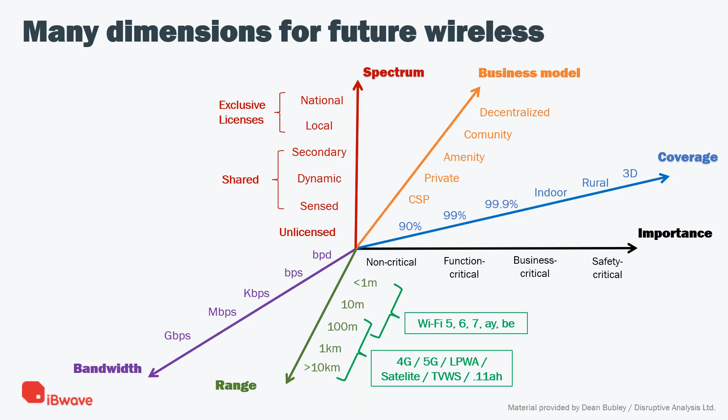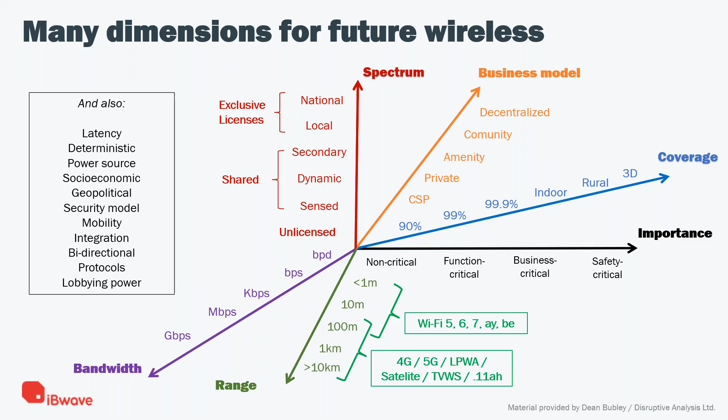And of course we are talking about many more aspects, some technical, some geographical or geopolitical. So we have latency, which is an important thing right now, and mobility. We have a lot more things, and probably in the future we will replace some dimensions, or we will have more dimensions for future wireless systems.

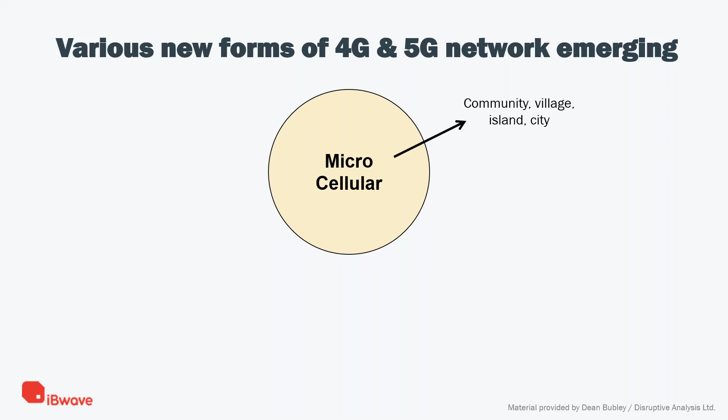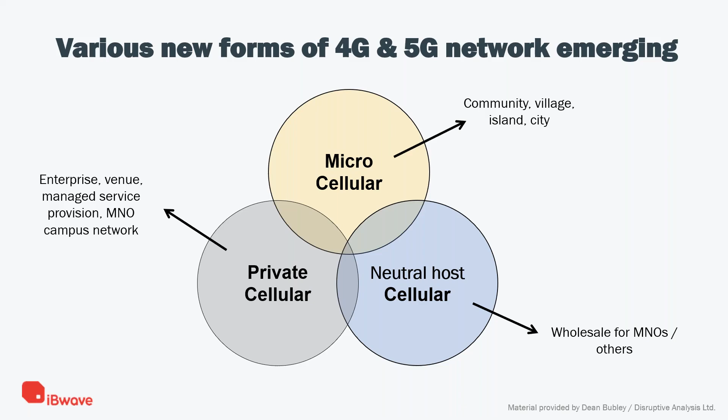But specifically for 4G and 5G networks, we have seen new forms emerging in the market. We started with microcellular systems, then we started to see neutral host cellular systems, and in recent years we started to see private cellular systems specifically. So what were the motivations to start with private cellular systems?

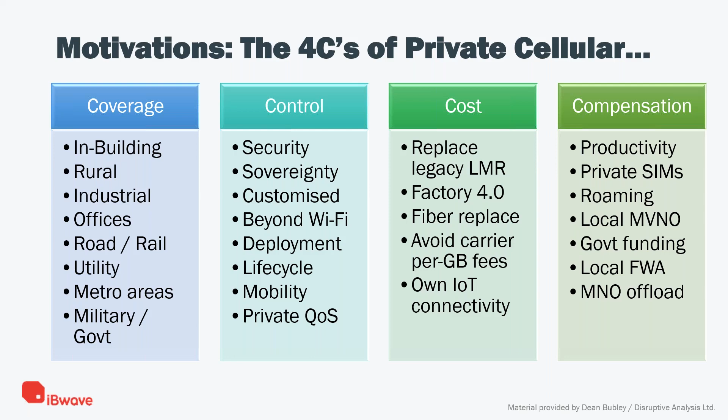And of course, the different companies start to see different necessities to control the system, from security up to customized systems, the deployment, the life cycle of each design. And of course, they are looking for cost, right? So looking for cost, they are looking to replace legacy LMR, fiber replacement, different types and new types of cellular systems. And of course, they are looking for some compensation, right? In productivity or roaming or different types of compensation. But basically with these 4 motivations, we start to see the beginning of the private networks.

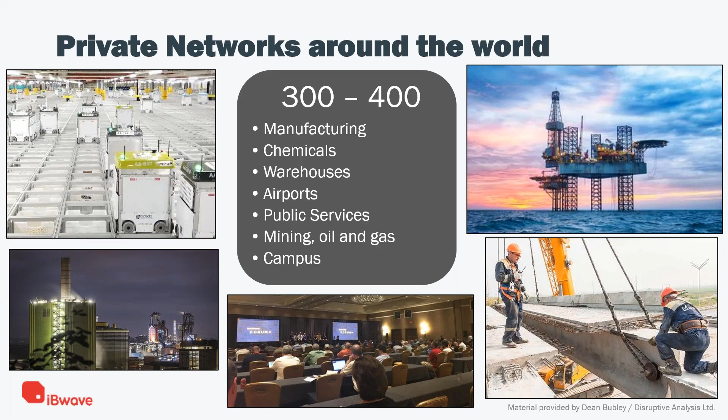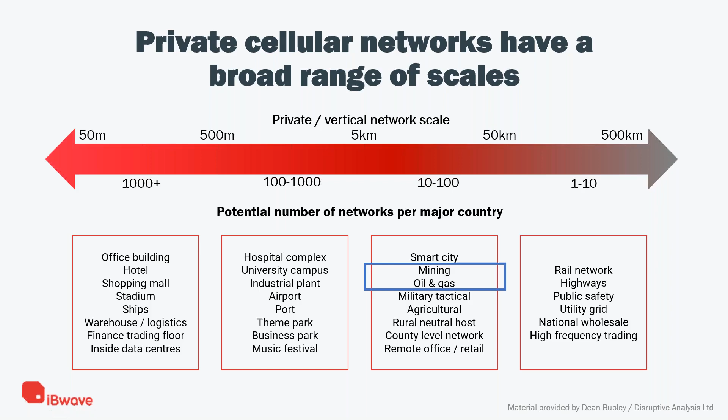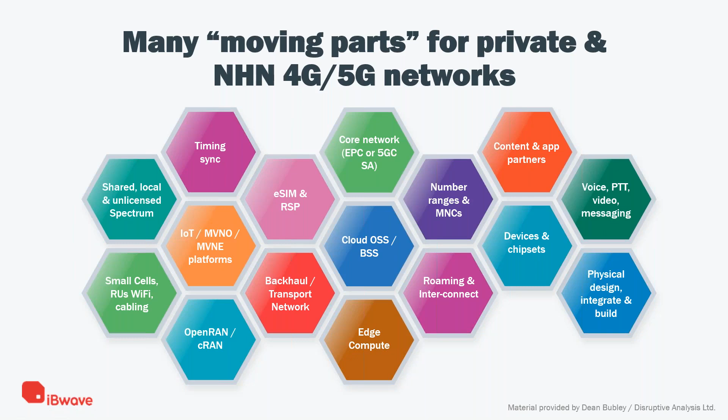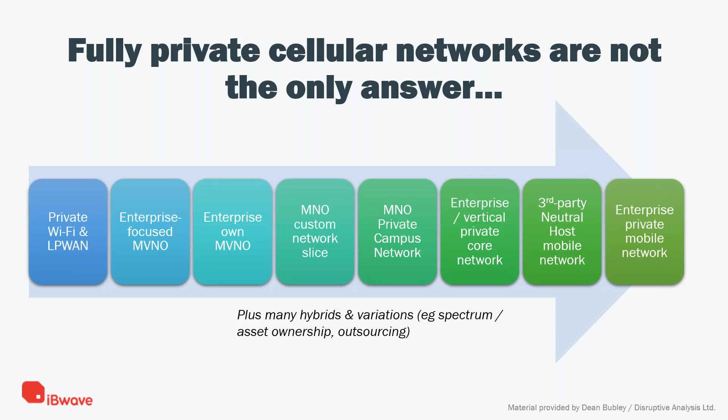So for each one, we will have different types of applications. And for this reason, since we have a lot of moving parts, a fully private cellular network is not the only answer. We will have a lot of different business models to implement our own private network, from the simpler ones, the private Wi-Fi network and LPWAN network, up to an enterprise private mobile network, for example. And we have many more hybrids and variations that we can implement. So the message is: not so easy, but we have a lot of options to implement a new private network.

And every time that we talk about private networks, we have a typical question, right? Will the alternative networks replace Wi-Fi, or how is the competitiveness scorecard between Wi-Fi and the new alternative private networks? And here the answer is: it depends. Because in different types of environments and markets, we will have some technologies that are optimal for one or problematic for others. So if we look at Wi-Fi, we have Wi-Fi as an optimal solution for some of these applications or environments, but a problematic solution for others.

And even Wi-Fi is changing, right? Right now we have Wi-Fi 6, and Wi-Fi 6 is more optimal for some, and better or worse for others. But when we look at the alternative networks, the same applies. They will be better for some environments, worse for others. So in general, I think that one will not replace another. Everybody will live together, and we will reach different environments with different applications and solutions.

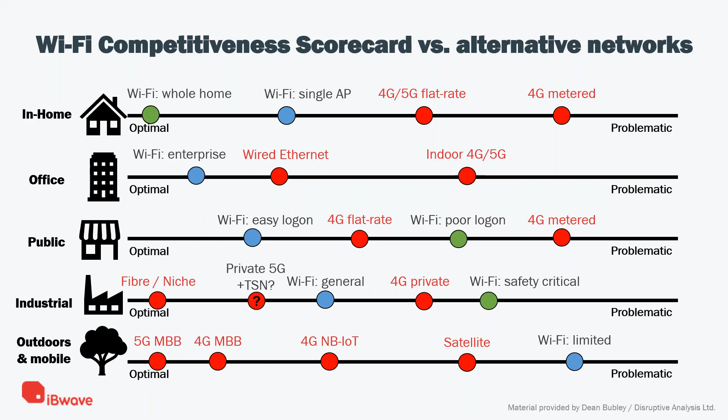And 5G will drive transformation of telecom itself, because if you look at the 4G era of mobile operators, normally we have the traditional operators, national and international operators. Depending on the country, you can have 1 up to 4 or 5 traditional mobile operators. But in recent years, we could see the tower companies, we could see the mobile virtual network operators, right? And with 5G, the expectation is to have consolidated national MNOs.

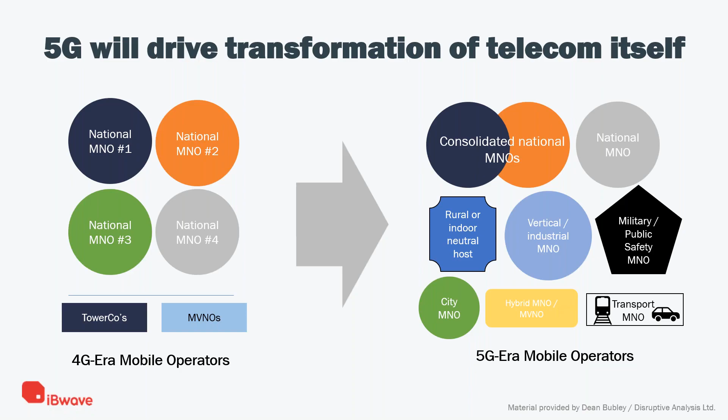We will still have the national MNOs, the traditional ones, but we probably will see a lot of new models of mobile network operators: rural, vertical, military, city, hybrid, a lot of new forms driven by 5G in the market.

And when we talk about mining private networks, mining private networks are real right now in the market. We have a lot of mining companies with their own private networks, and we will talk about the existing use cases in the market, the different technologies, and of course the challenges for wireless networks in mining environments.

Some important numbers for the private LTE market: the size of the global private LTE market is projected to grow from $4 billion in 2020 and 2021 to $7.5 billion in 2025, with a compound annual growth rate of 13.6%. So it's a huge number for investments just in the private LTE market.

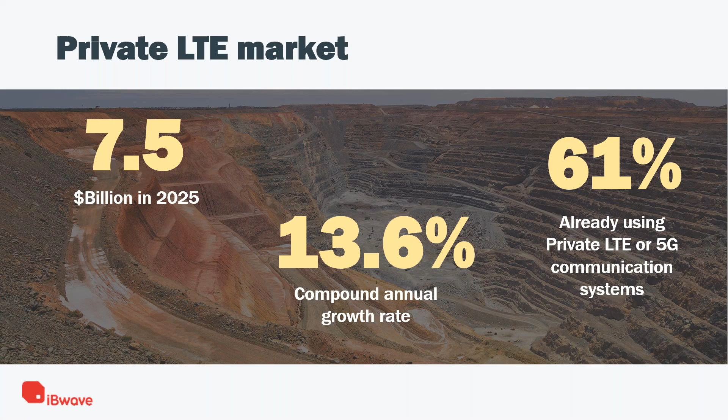For private LTE wireless networks, and specifically for mining, another interesting number shows that 61% of the top 50 mining companies around the world already have some private LTE or 5G communication system in their operations. And investment in telecommunications today is one of the top 5 priorities of the biggest mining companies. Why? Because we already have a lot of existing use cases in the market with different technologies.

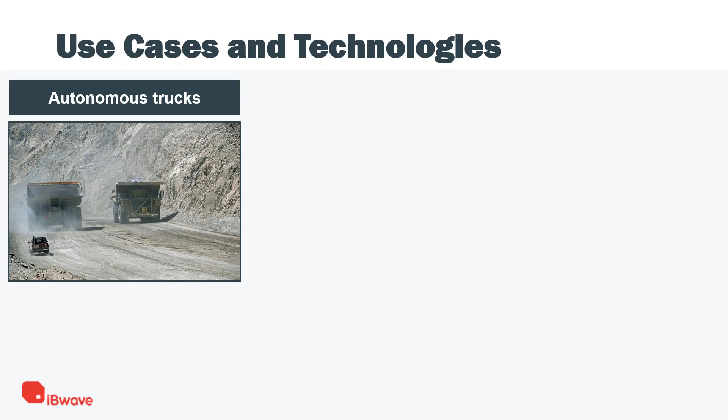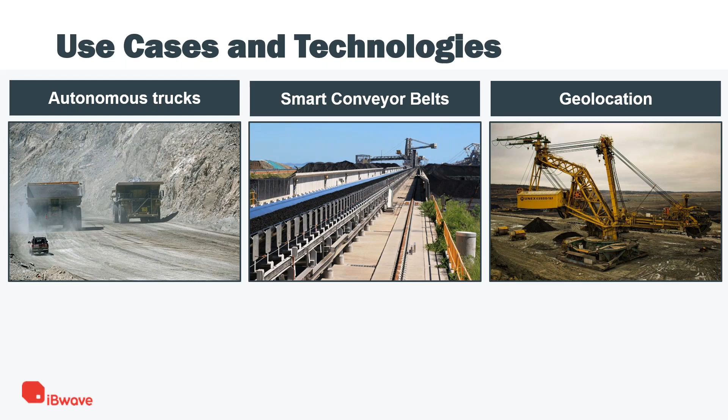A very common use case right now is autonomous truck operation. We have smart conveyor belts as another very important use case for private networks, and the geolocation of machines and people in the mining operation area. All these use cases work with different technologies, and we have a lot of new applications, especially to bring Industry 4.0 to mining operations.

When we talk about technologies, we have a lot running in mining operations right now, from public safety technologies up to Wi-Fi, cellular technologies, 4G, 5G, and even for IoT networks some specific technologies like LoRa, for example.

And what is the challenge for wireless technologies in mining environments? Typically, we can divide mining into different types: surface mining operations and underground mining operations. But the challenge is very similar for both. The first one is the environment. A mining environment is constantly changing.

And more than changing, the existing environment is normally very aggressive for wireless technologies. It is not so easy for wireless propagation, especially regarding the materials, the tunnels in underground mines, and the losses we have in propagation. So this is a big challenge for mining wireless designs.

Another challenge is that when a mining company looks for a private network, as we saw in the motivations, they are looking to increase productivity. They are bringing what we can now call mining 4.0 applications. The idea is to increase productivity with an increase in safety. It's very important to maintain or increase safety in the mining operation, and for this reason they are using a lot of different applications.

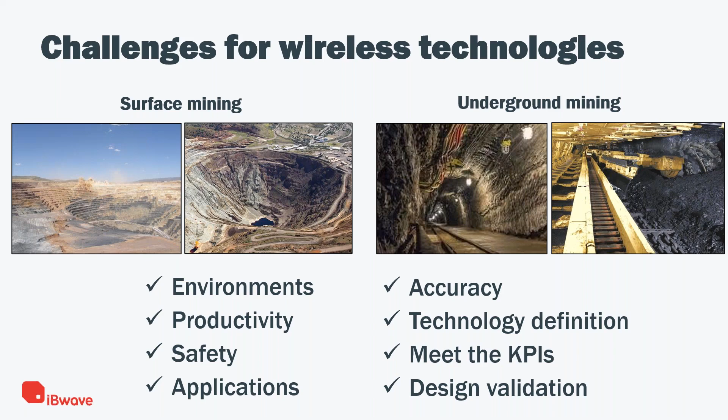And of course, design validation is a very important challenge, because the mine will continue its operation. Probably in the future we will have new technologies, so we need to validate the design and prepare our solution for new technologies.

And at iBwave, we have solutions for mining private networks that address all these challenges and cover the entire process of a typical wireless design. A typical wireless project has different phases: in general, the project plan, survey, design, install, and operation and maintenance phases. We have a complete solution that can help the private network in all these phases. We have a mobile application called iBwave Mobile Survey.

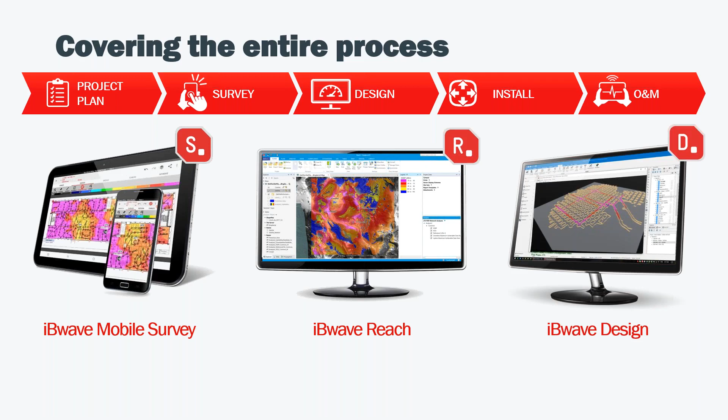We have two different design tools, one for outdoor mines, that is IBWave Reach, another one for indoor or underground mines, that is IBWave Design. And we have a management platform called IBWave Unity that permits the management of the project during the entire process, generating all necessary documentation, reports and dashboards in order to increase the collaboration and the integration between the different teams that will work in each phase, right?

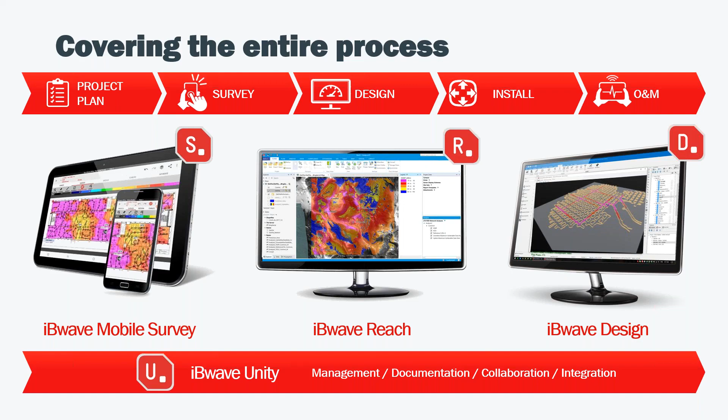So if we look in a general and very fast view, the idea of the IBWave solution is to have a centralized end-to-end design for better cost and quality control. So the idea is to have just one format, just one standard, the IBWave format, that will be a digital format since the beginning. So we will start with the first version of the project during the project plan phase. We can create this first phase in the mobile application or in the design tool. But the idea is to start with just one model, just one standard, create our template for this project, and then move forward to the different phases, just applying the changes and the new documentation and the new analysis that we will have in the next phases.

So we can move forward and exchange the versions between mobile and project and design applications. And then we can do the pre-design, we can perform the complete design, the fine design, then we can provide the installation documentation and reports, and then we can validate the design, and then we can help with the operation and maintenance, especially using Unity, because the idea of Unity is to have the full control of the entire phase,

the entire process. So in Unity, we have a synchronized site database, and we have advanced data mining and reporting. We have unlimited workflows to follow up the project during the different phases. We have powerful reporting. We have dashboards. So we have a central database of components and a very powerful collaboration and file sharing platform. So this is the full solution. This is the entire IBWave solution.

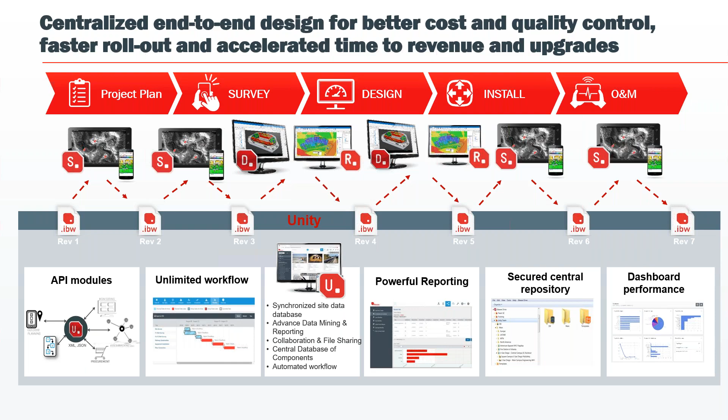Now I will show you a demo. So I prepared some demos in different mine environments just to show you the project tools. Of course, I don't have time to show the entire process, or the integration between the tools, but I will show you that with the IBWave solution for mining, the RF engineers can model a surface or underground mining environment, and with indoor and outdoor network elements with different types of solutions and technologies, it's possible to do the complete design and reach the network KPI requirements.

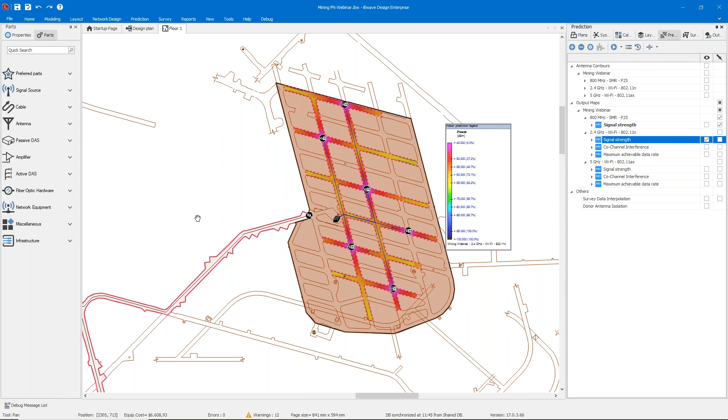So for the underground mine, remember that the tool is IBWave Design Enterprise, and for surface mine, the tool is called IBWave Reach. Okay, so let's start with an underground mine sample. So I will show you the first one, and here we have our IBWave Design. Here in the IBWave Design screen, you can see that it is a Windows based tool, right? So the idea here is to create the 3D modeling environment of the underground mine and perform all necessary analysis and

prediction maps, right? In order to create the 3D modeling, I can work with different types or formats of files. So I can work with an AutoCAD file of the mining plan, or a PDF file, or even an image file. And the idea is to create the entire 3D modeling. So I will create the walls, I will create the surfaces, and then after creating this 3D modeling, I will start to create my design. So this is a multi-technology, multi-band, multi-frequency tool.

So in this sample, I have two different systems. If you look here in the design plan, we have our unifilar diagram. And here I have two different systems. One is a public safety system in P25 technology, and the other one in Wi-Fi. So here in the public safety system, I'm using radiating cables, and at some ends of the cable, I have some Yagi antennas placed here. And of course, for the Wi-Fi, I'm using the access points.

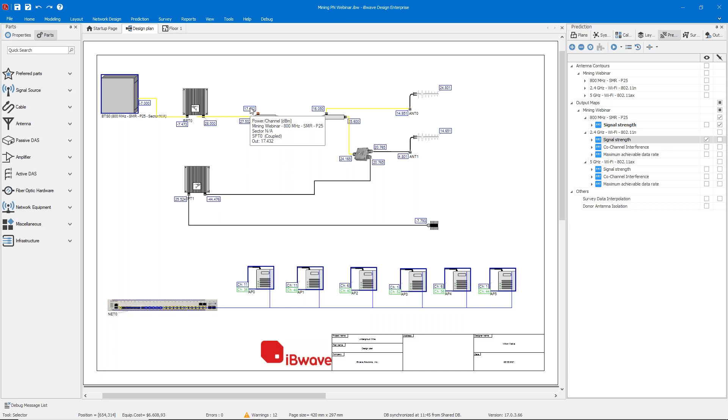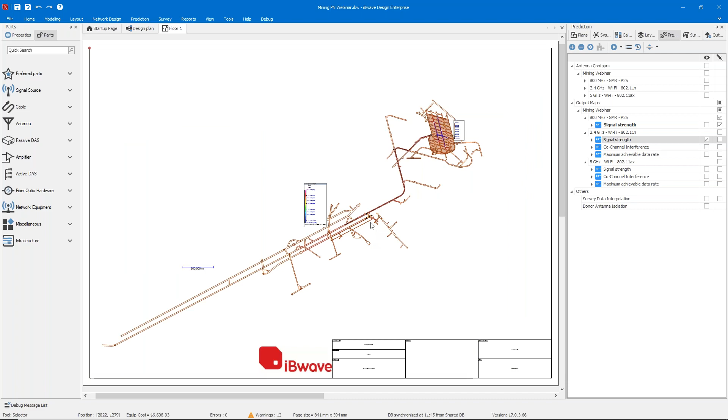But here you can see that in IBWave Design, we can do the entire design, not only the RF source elements. I can do my complete design with the entire cable information, all elements. And here, in the P25 network, we can see that the tool automatically calculates all link budgets for the system. So I will have the losses and gains calculations. So once I create my design, I can distribute the systems, the components here in the mine.

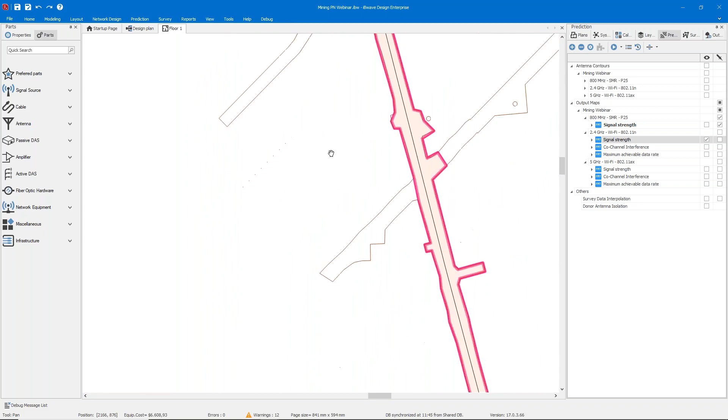So here I can see, for example, the different tunnels, and here in the tunnels I can see my radiating cable, right? So here, for example, I have my divider, and then I have this radiating cable that will provide the coverage in the entire tunnel up to the next divider. And here below I have the same for the antennas, right? Here I have the two Yagi antennas.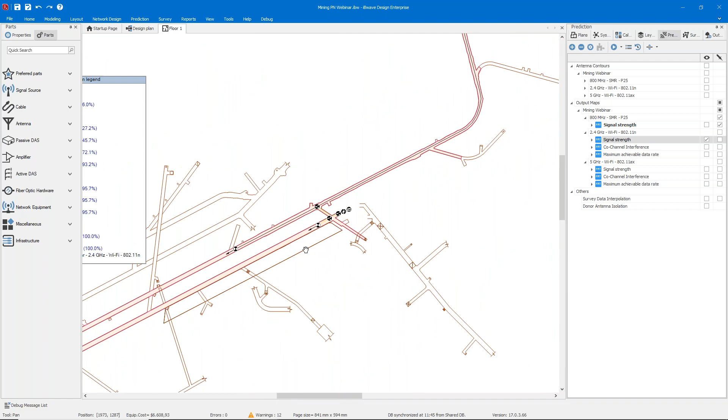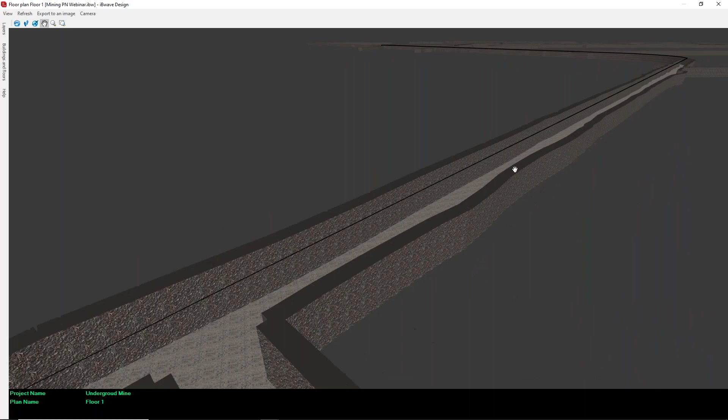But here we are looking at 2D view, right? But here in iBwave, we have an option to see the entire design in 3D. So if I launch the 3D view of this mine, I can see this complete design in 3D. And in 3D, I can validate, for example, the tunnel modeling. I can validate the height of the components, the height and the position of the radiating cable, for example.

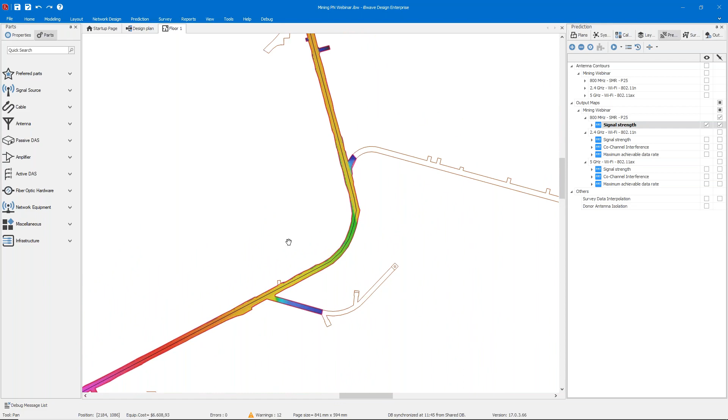And here in the tool, I just need to come to the prediction panel and run the output maps. So for each technology, I can run different types of prediction maps. I can run coverage analysis, signal quality analysis, capacity analysis. And if I need to see some result, I just need to select, for example, the signal strength, and I will see the coverage, and the propagation model will calculate the signal strength in each area of the tunnel, right?

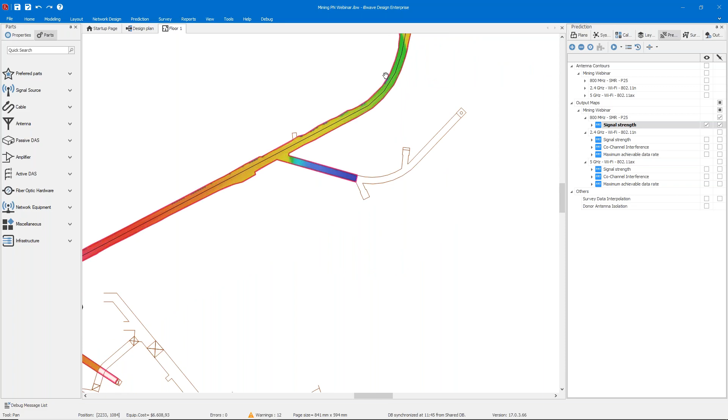And if I select this option, signal probe, I can see the signal changing along the tunnel, right? So I can see the different levels of signal in the mouse location. And this output map I can see in 3D as well. So if I come back here and launch, for example, the prediction image, I will see the prediction in 3D as well.

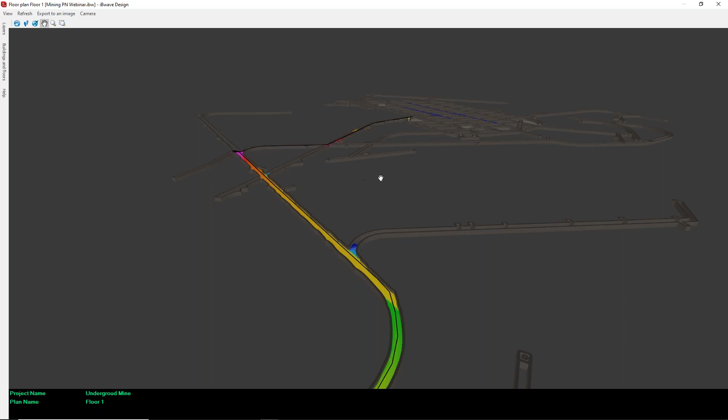So the 3D is very helpful during the design, and is another format to show the final design to the customer, right? So it's another option to provide the documentation at the end of the design, because I can generate images, I can generate videos, a lot of types of information here.

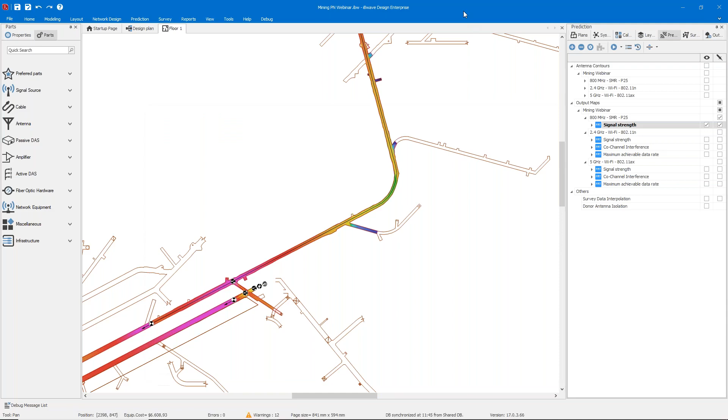And here in the exploration area, for example, I have another system in Wi-Fi technology. So I can see, for example, the same signal strength for the Wi-Fi system. I can define the prediction area, so I can define a specific area for the design, or the most important tunnels to cover, let's say. And I can perform other maps such as co-channel interference or maximum achievable data rate. We are talking about 2.4 gigahertz, right? But I can do the same for 5 GHz.

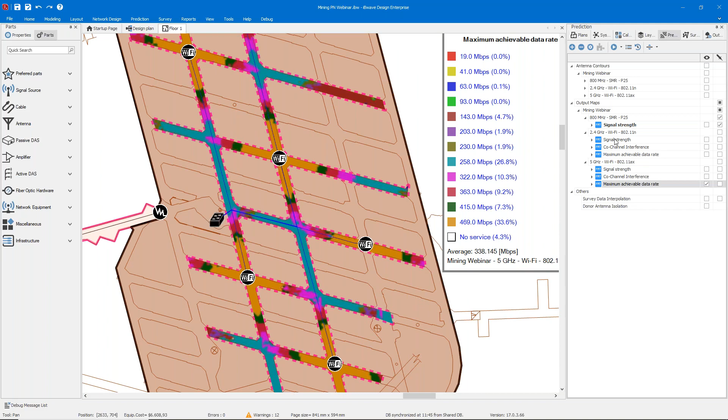Here you can see that we already have 802.11ax. So the tool is prepared for Wi-Fi 6, and I can see the same output maps and generate the same analysis for 5 GHz. And if we look at maximum achievable data rate, for example, in 5 GHz, in Wi-Fi 6, we can see a maximum achievable data rate of 469 megabits per second. And if we compare with 802.11n, we'll see the difference, because here we have just 195 megabits per second, right?

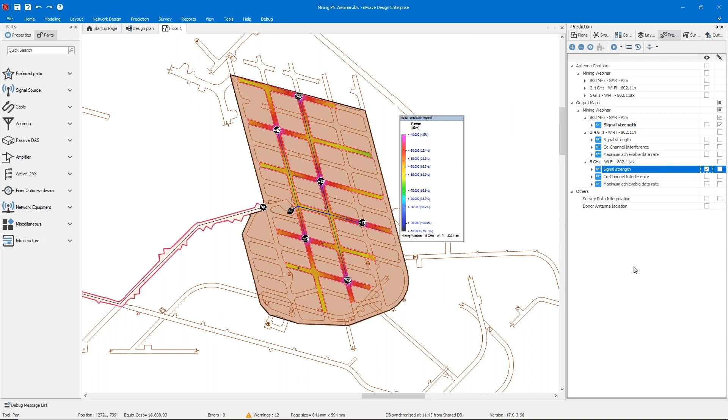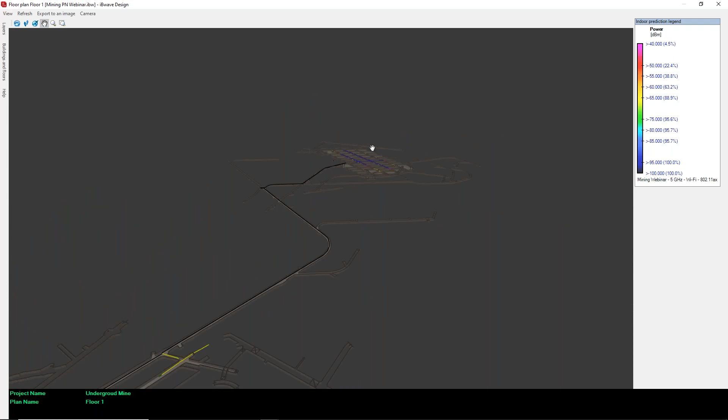And of course, if I want to see the Wi-Fi in 3D, I just need to select the map, come back to our 3D, and if I refresh, I will see now the coverage or the output map of my Wi-Fi system, right? And this mine sample is all on the same level, right? All tunnels and the exploration area, the entire mine is on the same level.

And you can ask, okay, Milton, but how can I do this same 3D modeling in a multi-level underground mine? No problem. We can do the entire 3D modeling in a multi-level mine. So I have another sample here just to show you this 3D. This is for different levels, so it's a multi-level mine. I can do the entire 3D modeling.

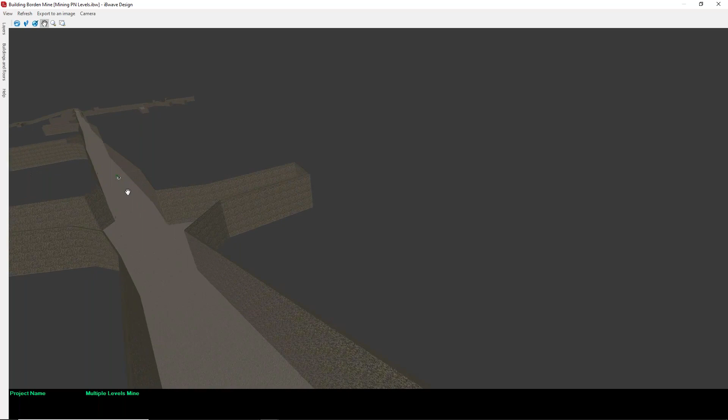So if we go here, we can start at the entrance of the mine, and then in iBwave we can model the access ramps. We can model the different levels. And in this case, we have a private LTE network with small cells. And for the small cell, for example, we can apply the necessary downtilt. So in this arrow, we can see the downtilt that we can apply to provide continuous coverage and connectivity along the axis of the mine, right?

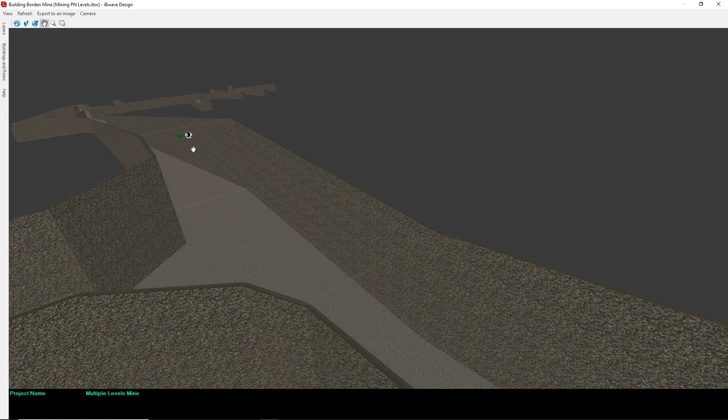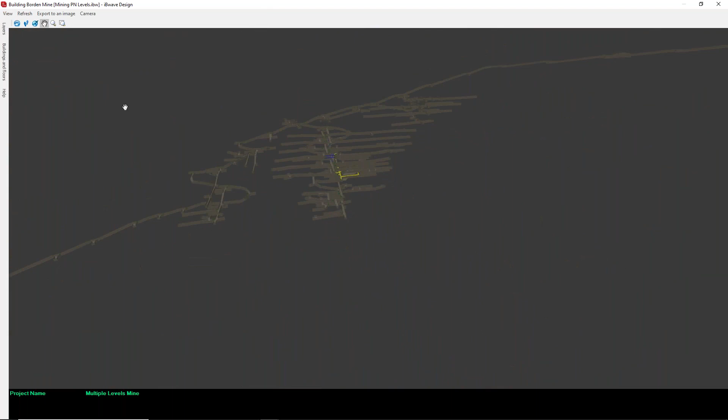And then if we go down, we'll see a second small cell here. And of course, if we want to see the entire mine, we can see the different levels. So in this case, we can perform the complete design as well. We can have the cabling, we can have all the elements of the project. And if I want to see the output map, I just need to select the prediction image, and then I will see the output map here in 3D. Oops, sorry, I unselected it.

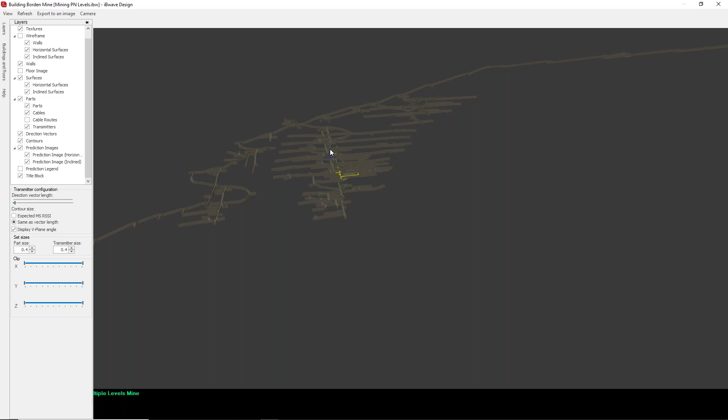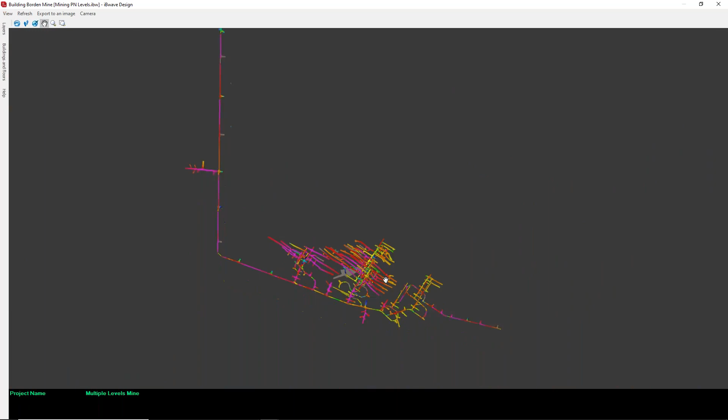See, now I can see the coverage in each level, in each tunnel, in each ramp, access ramps, I can see the entire 3D modeling. And here I can see, for example, the top view. And I will see in details the tunnels. So I have a lot of options here, a lot of tools here in the 3D to generate different documentation, different types of information, right?

And of course, I can create the different reports. So in the end of the project, I can generate all necessary reports, from the link budget, automatic calculations, up to equipment list, that is the bill of material report, the cost detail reports, because I can define costs for each element. In the automatic, I will have the entire cost of the design, and of course output maps, compliance reports. So I have a lot of options in automatic reports to accelerate the design process, right?

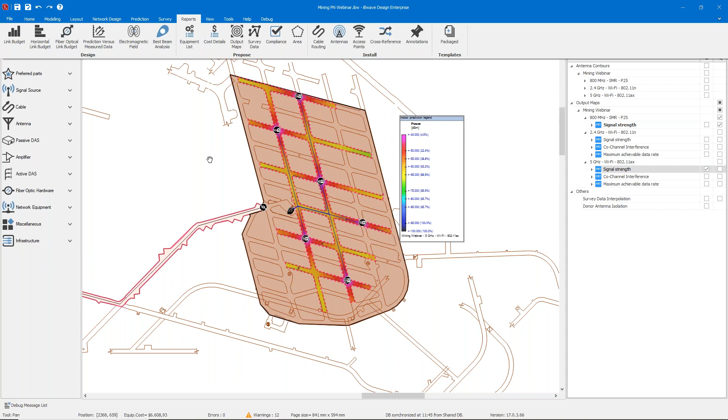So this is the underground sample. And now let's move forward, and I want to show you another one in the outdoor mine environment. So now I will change the solution, right? I'm changing the tool, because for the surface mine, we need to use another tool, that is iBwave Reach.

Why? Because when we talk about the outdoor environment, in the 3D modeling for the RF propagation calculations, in the outdoor environment we work with another type of inputs, right? So in the indoor, remember that we can use an AutoCAD plan or PDF or image, but here in the outdoor, we need to work with geodata information, right?

So we have a very typical sample here, some outdoor or surface mining operation area, right? Typically here we will have a lot of exploration areas. So in these areas we have the exploration, right? But here we will have roads, we have access, we will have administrative areas, we will have a lot of important areas to provide the service in the entire mine environment, right? So here, in order to create the 3D modeling, we need to work with the geodata.

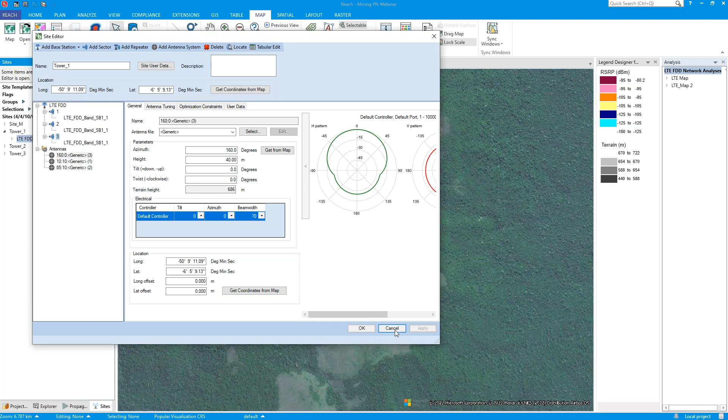After creating the entire network, I just need to run the analysis here, and then I will see the output map. This is the area RSRP prediction, for example, in the entire area. If we pay attention here, in this operation zone in the mine, we can see that we have some poor signal values, something around negative 105 to 125 dBm for RSRP.

Depending on the application, if you are running an autonomous truck, for example, here we can start to have some connectivity problems in this area. So typically, to solve this problem in the exploration area, the mining company will not build a new tower just for this area.

Normally they work with mobile sites, exactly here in the tool, that is a benefit of the tool, because here I can create a mobile site. I can place or find the best placement for the mobile site.

When we run the prediction again, taking into account the mobile site, I will see the coverage with the mobile site. And then I can see that with the mobile site in this point, in this placement, I will solve that shadow problem, the coverage shadow problem in that region.

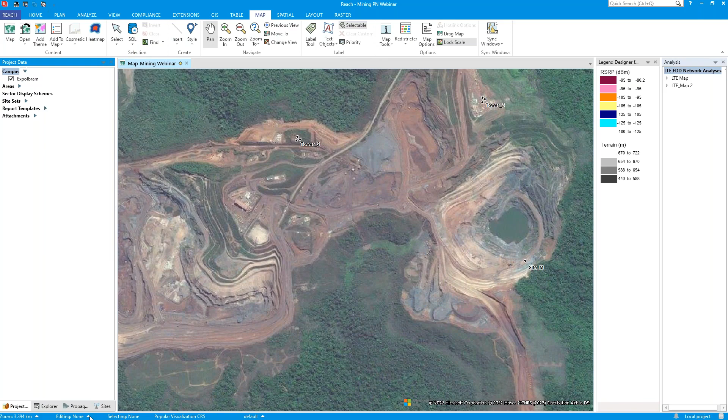And then if we go there in the outdoor tool, I can make a link between the tools. So I can come here and point to the campus option. I can point here, for example, to where I have my IBW file, where I have this building design in iBwave design.

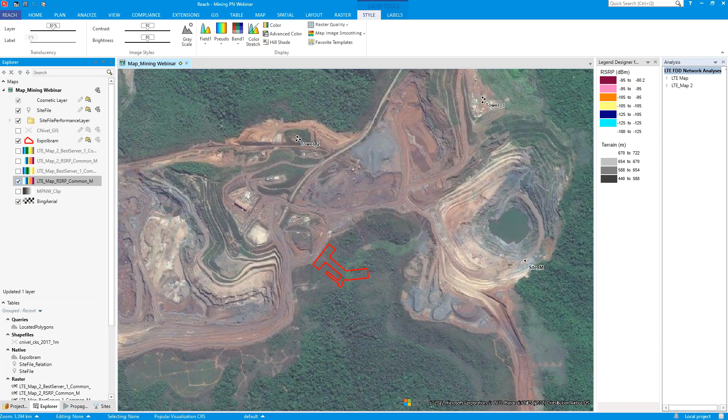And then here, since we have that building geolocated, if I select here, I will see where the building will be. If I have the position and the azimuth of the building in the area, and if I have the prediction of the private network system, I can export this outdoor signal in order to see if the outdoor signal will attend this building.

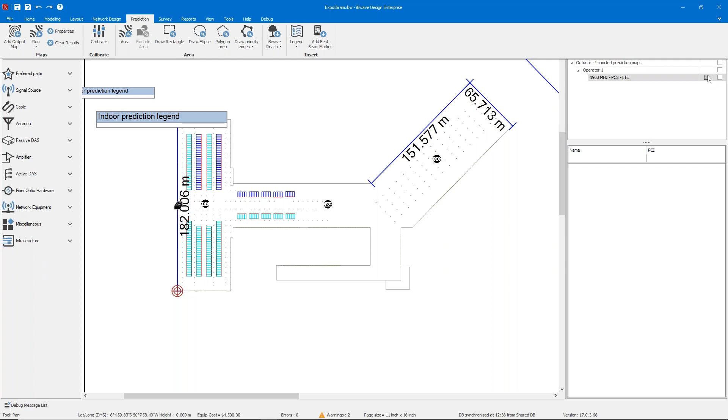We don't have the level of detail that we can have in iBwave Design. So with the integration, I can export this outdoor prediction, and I can come back to iBwave Design. Here I can work with the same reach signal, go to the prediction menu, and import the outdoor prediction.

This outdoor prediction that we are looking at here is exactly this one. In reach we just have different range colors in the legend, but it's exactly the same outdoor prediction. The idea here is to take advantage of the benefits in iBwave Design.

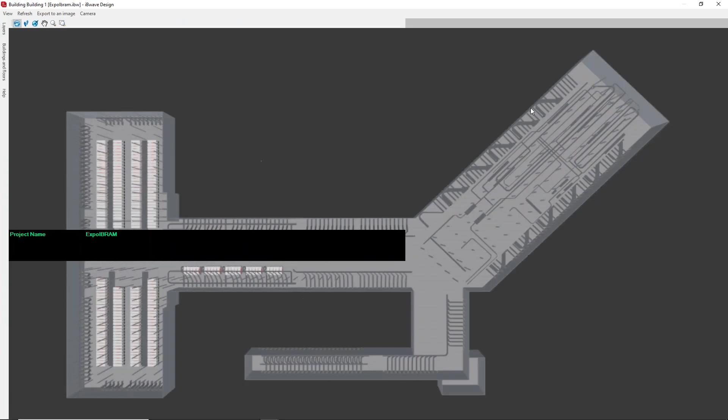Because in iBwave Design, if I launch the 3D view, I have the entire building in detail. I have the detailed 3D modeling, all the different walls, the columns. I can model, for example, trucks, everything I need in order to create the worst case scenario.

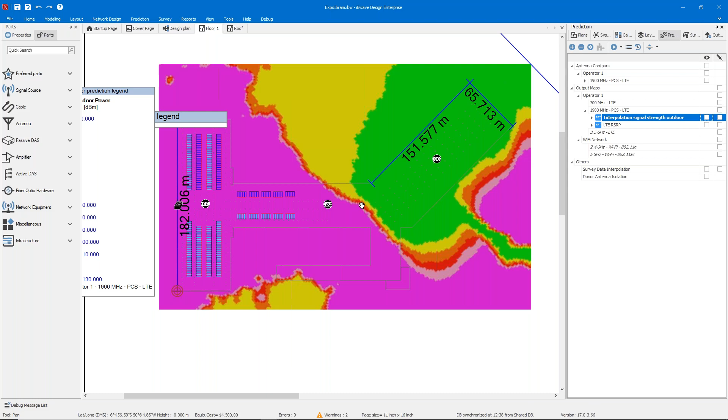I will run a prediction here in the indoor tool that performs interpolation. When I run this output map in iBwave Design, I take the outdoor signal coming from different towers and interpolate it inside the building using the 3D modeling that I have. If I launch this, we can see the impact of the different materials.

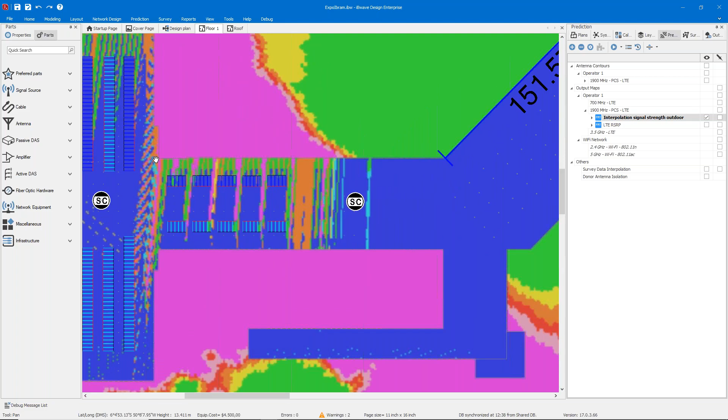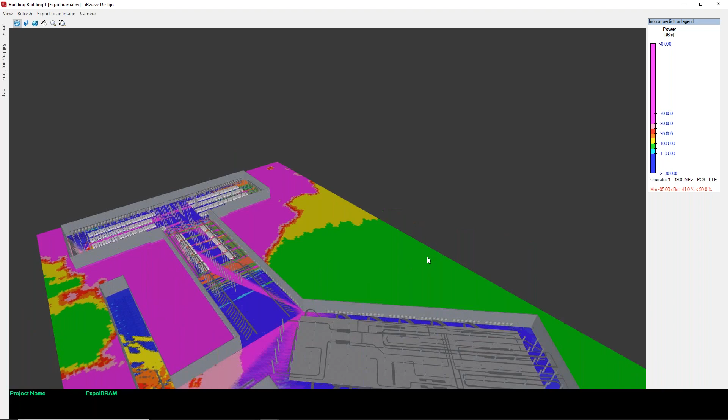We can see the losses of the materials, the losses of the columns, the outdoor surround wall. So if we go to the 3D view, I can refresh and activate the prediction, and we'll see that the outdoor signal is still the same. But the indoor signal will show the impact of the internal walls, the internal 3D modeling.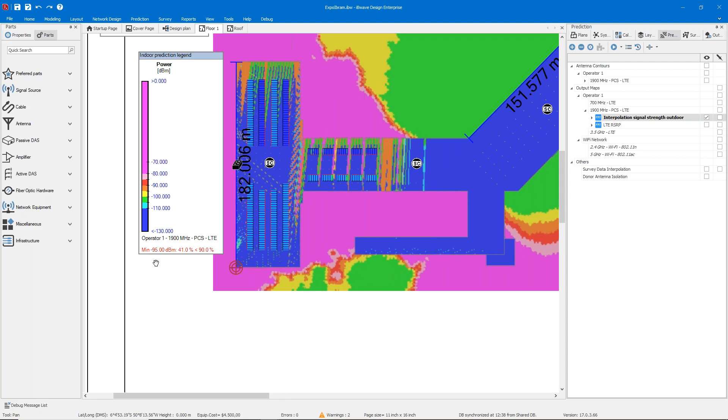And I can see that, in fact, here in the indoor design, I cannot attain the KPI. Let's say my KPI is negative 95 dBm in 90% of the area. When we run the output map, we can see in the legend that we are reaching just 41%, shown in red, meaning we are not attaining our KPI. So if we're not attaining this KPI, I need to provide an indoor solution.

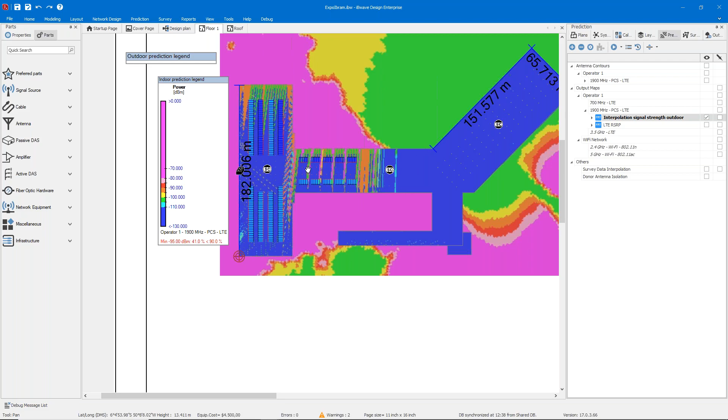If I provide an indoor solution, for example with small cells, I can run another map with that indoor solution. Running this map with the indoor solution, I have 94.5% with the minimum of negative 95 dBm. So now with the indoor solution, I can solve the problem of the outdoor signal.

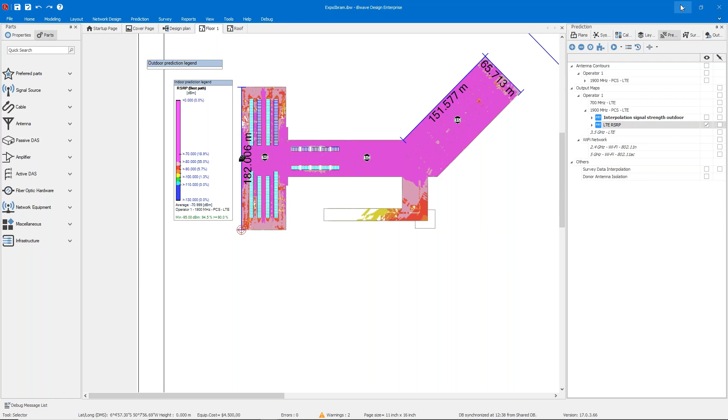I can do the same here in reach, if I want to see the impact of the indoor solution. I don't have time to show everything, but when we are talking about the iBwave solution, we can see that we can solve or reach all the challenges we've been looking at during the presentation.

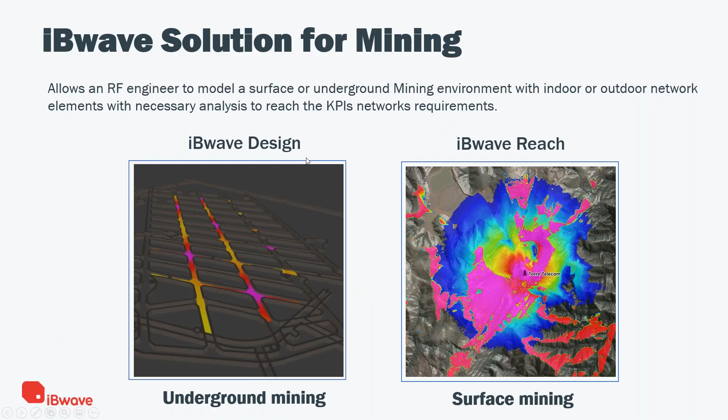So just to finish here and draw some conclusions from the demo, with the iBwave solution we have key benefits. We have time saving for large environment modeling, greatly attending any type of mining, with solutions for all different types of mines and mining design environments. We can provide a greater quality design, with one holistic design for multiband frequency and technologies.

You could see that we can validate KPIs, apply changes and make analysis with coverage, quality, and capacity, and we can apply changes to attain all necessary KPIs for different types of applications. And we have an enhanced design for future networks.

Especially now that we are talking about 5G, HetNet, and a lot of new technologies, since we have our project, our first version, with the first 3D modeling and first environment, I can perform any type of analysis. I can create new scenarios with new technologies, considering outdoor and indoor signals.

I have this integration, and I can solve any concerns on costly file migration programs, for example. So I can validate that, in the future, if I want to implement 5G, I have the environment — I just need to create the system and evaluate the cost.

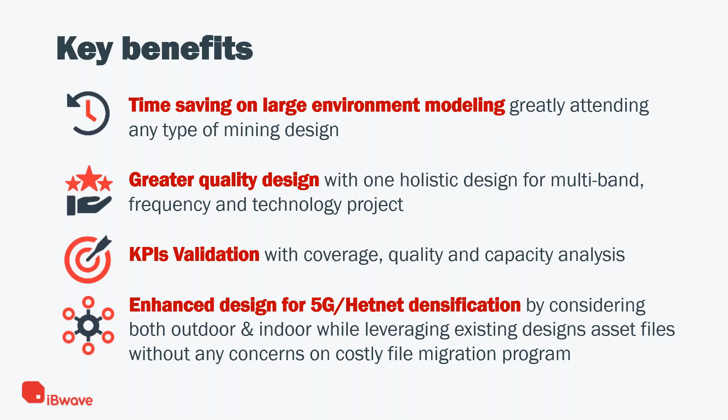This is basically what I would like to show you today. Now we have some time for questions and answers.

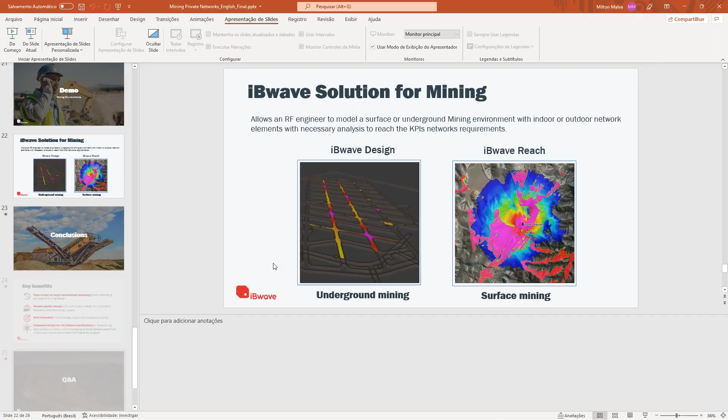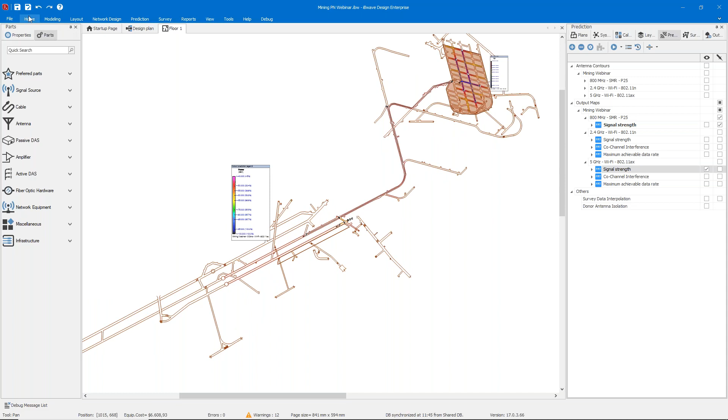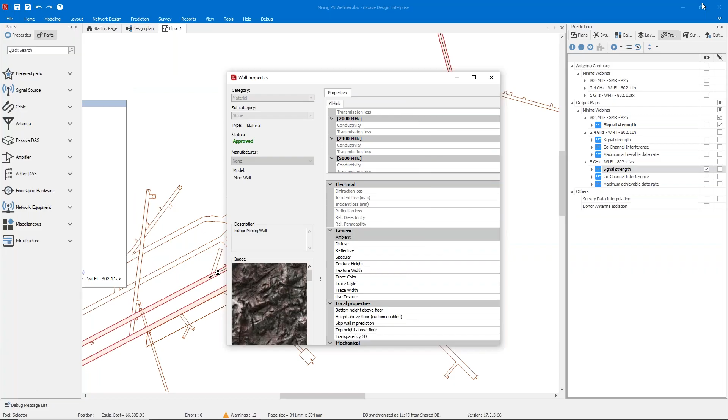Yeah, sure. When you are talking about the materials, we have a powerful proprietary propagation model, and this model takes into account all possible paths, including direct line of sight, reflections, diffractions, and refractions. In order to do that, if we double select, for example, the wall here, we will see existing indoor mining wall materials or surface mining wall materials, and for each one we will have specific parameters for the entire calculation, since the losses differ by frequency. So for each one we apply the transmission loss and conductivity values, but here we have the electrical values - the values we need for incident loss, incident reflection loss, and electric permeability for the entire calculation, taking into account reflections, diffractions, and refractions.

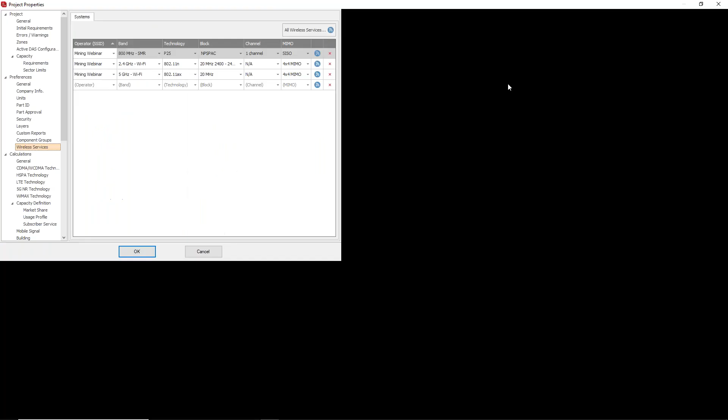Yeah, sure. In both tools, when you are creating your system, you can define the system properties - for example, we have wireless services, and for each one, when you select the band, you have access to all different technologies. You can see we are ready for millimetric waves and 5G as well. When you select the band and define your technology, you can create the properties of each one, and we support up to 4x4 MIMO for LTE and 5G. Now it's possible to create SISO and MIMO systems in different configurations.

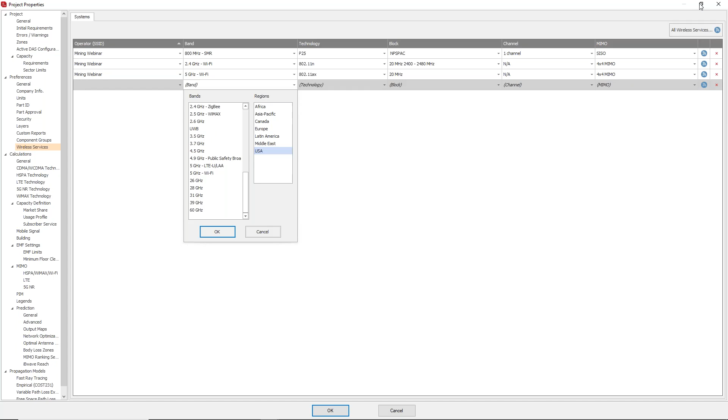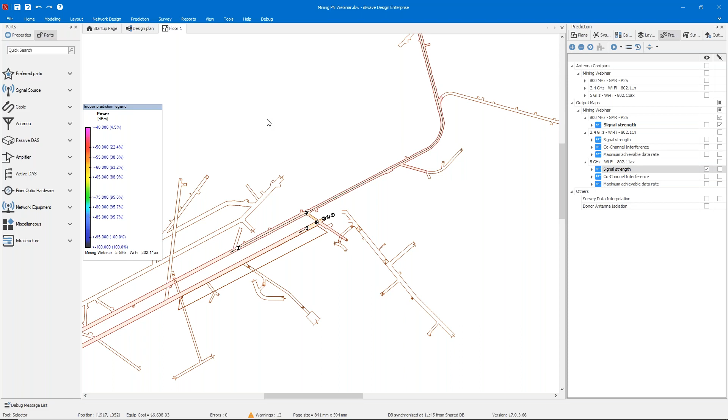Yes, sure. In this case we have a radiating cable, so we are calculating the propagation of the radiating cable. But if you are using a typical cable, automatically iBwave will calculate the entire losses according to the cable length, for example. So all this information regarding cable loss and cable characteristics - you don't need to take care of it during the design. You just need to do it, and the tool will calculate everything automatically.